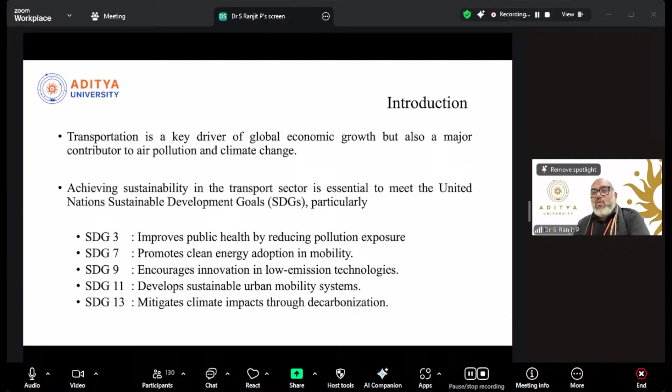It mitigates the climate impacts through decarbonization. That is one important thing I would like to say. One has to reduce emissions from the tailpipe of fuel vehicles, because mostly we are using conventional fuels and IC engines, and people are talking about so-called electric vehicles. I will come to that point, how good and bad electric vehicles are, I will discuss that.

Then the next point is environmental impacts of transportation. Transportation together contributes 25% of global carbon dioxide emissions. Out of this 25%, 75% is coming from road transport itself. There is air transport, road transport, and water transport. Out of which road transport contributes 75% of that 25% of global carbon dioxide emissions.

The pollutants include carbon dioxide, nitrogen oxides, sulfur dioxide, unburned hydrocarbons, and particulate matter. These are freely available in the environment but may cause a lot of disturbance to human life. These emissions cause smog formation, acid rains, contributing to global warming. Rather, I would replace this term global warming with global boiling now. There is no warming, it is boiling now, global boiling.

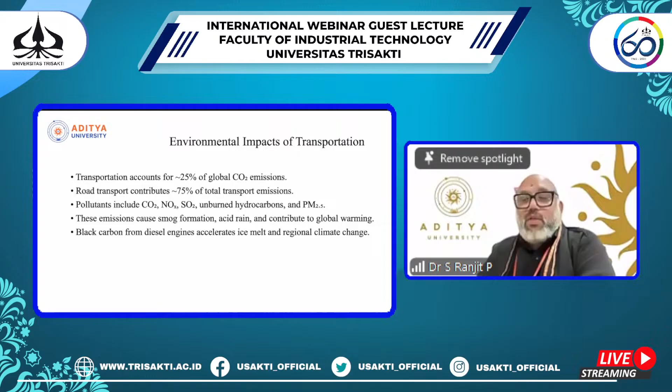And you do know that black carbon from diesel engines accelerates ice melting in the glaciers in the Himalayan region, and that is how sea level is rising. That is how, even in Indonesia and Jakarta, you know very well what the situation is and how much sea level rise has been taking place. You are well victims of this, only because of the pollution which is coming across.

Now then what do I have to do? I have to maintain some strategies for sustainable transport. The strategies, let me say, adoption of electric and hybrid vehicles. It's very good, the word looks very good, it sounds so great, everything is comfortable. Yes, very nice, electric vehicle and hybrid vehicle.

Now a very important point is, what is the tailpipe emission of the electric vehicle? Absolutely, emissions are zero except water. Water is not an emission. It's very good, but even water is not available as a tailpipe emission. Electric vehicles have no tailpipe, nothing as tailpipe emission. But what's the problem with the electric vehicle?

Electric vehicle, the present-day problem is very simple. One is the charging, second is protection, third is what kind of electricity you are using to charge the vehicle - is it green electricity or not?

The reason being, if you are generating electricity using non-renewable sources like fossil fuels or similar activities, then you are just shifting emissions from the tailpipe to the chimney of a thermal power plant, which doesn't make any sense. Whether polluting from the tailpipe or from the thermal power plant chimney, it remains the same - the environment is being polluted, just for the sake of not polluting in the city while polluting outside it. That doesn't make any sense.

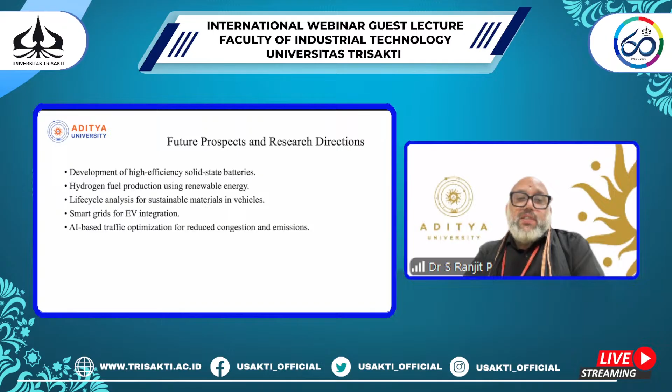But this will help reduce congestion in the traffic, so emissions can be reduced.

Next, there are some case studies on sustainable transport. For example, Norway: 90% of Norway is mainly depending on renewable energy, out of which 80% of new car sales are electric. The reason being they depend on renewable energy, that's why they are using electric vehicles. There's no doubt about it. You can go ahead with it.

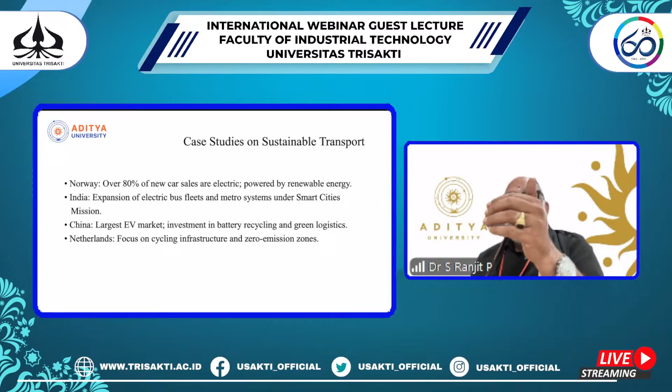And India is expanding the electric bus fleet and metro systems under the smart cities mission. But the electric bus fleet doesn't make any sense unless India changes technology from thermal power plants to nuclear power plants and renewable energy sources. Again, renewable energy, nuclear power plants is a big debate - radiation is the big debate, and I don't want to comment on that. But rather than the nuclear radiation death rate, if you look at the death rate because of accidents, the accident death rate is very high, exponentially, compared to the radiation death rate. But people are not aware of all these things. Simply, they say nuclear energy is not permitted in our area only because of radiation. People must be aware of it.

Then, when you have new renewable energy in place, electric vehicle technology is the topmost.

Next is China, where most of the lithium-ion battery materials are being imported from, and most of the resources are available there, making them global leaders in the EV market. Let me say very frankly, they are supplying a huge amount of battery material to the world. That is how they are growing. And the Netherlands, another way.

If not electric vehicles, why don't you use cycling? It's not that everything needs a bike available. Check it out, there is no path available for cycling in these Asian countries, except a few areas like Japan. Otherwise Asian countries don't give that much importance to cycling, including India. We feel that cycling means we are the poor guys.

But my dear friends, I am saying that in developed countries a separate path is dedicated for pedestrians, and a separate path dedicated for cyclists. That's why top priority is given to them. That is how people are using it.

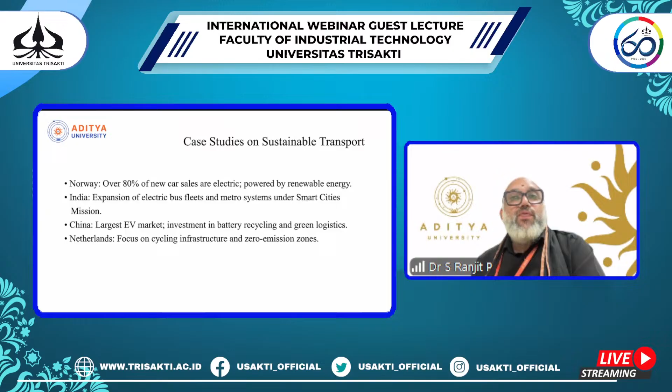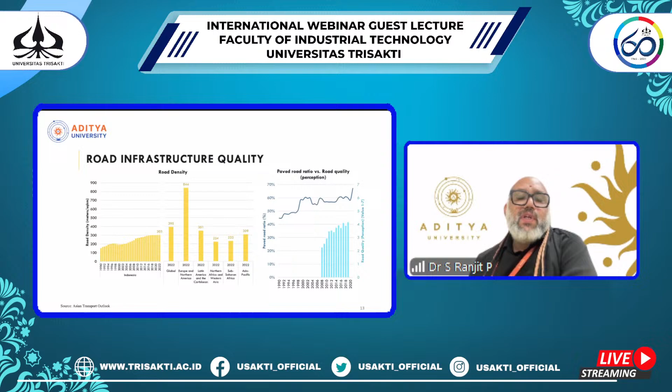Now road infrastructure quality, let's consider this in the form of road density. Checking from 1990, 92, 94 to 2022, the road density is increasing in Indonesia. It's a good sign, it's increasing.

If you look at other places, Europe has the maximum at 844, of course there's no comparison between Indonesia and Europe. Looking at Asia Pacific, Sub-Saharan Africa, Northern Africa, Latin America, the global figure itself is 395. Indonesia is 303, which is okay, not bad. But Europe has reached a road density of 844, the topmost.

That's the road density, meaning how many kilometers of road is being constructed in a given square kilometer of area. That's most important. Road construction is the topmost priority.

Because if the infrastructure is in place and transportation can be maintained perfectly in a sustainable way, then the nation can reach the next level in the forthcoming years. Without infrastructure, having good technology in vehicles, sustainable engines, sustainable vehicles available, doesn't make any sense. First is infrastructure. Infrastructure needs to be there.

Infrastructure, the first and foremost important thing, is the road. If the connectivity of the road is there, and if you can travel 200 or 400 kilometers in just 1 hour, 1.5 hours, that's a great honor, that nation can reach the next level. That's most important, what the developed countries are planning into. That's the way we can look into it.

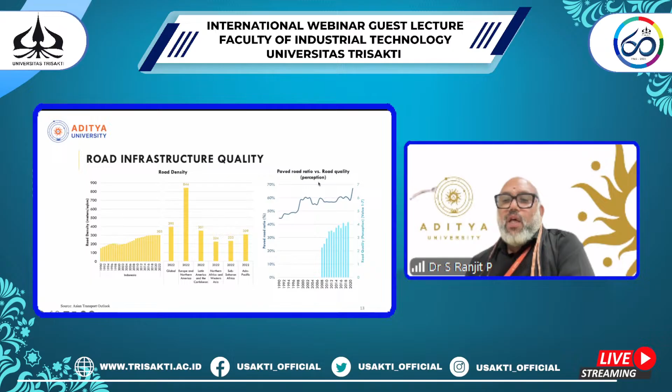Now if you see the paved road ratio with the road quality, it is also increasing. That's great, one can look into that aspect.

And the vehicle registrations, if you look at that, now in Indonesia the GDP per capita has increased by 4 times, and the road infrastructure has only doubled. Just check this out, this is the problem where Jakarta is experiencing traffic. Per capita GDP increased by 4 times, everyone is now becoming richer and richer.

It's okay, it's a good sign. But are the roads available according to the requirement of the public infrastructure? The answer is no. That needs to be concentrated on.

Vehicle registrations have increased by 15 times, and two-wheelers have increased by 19 times. This is most important, my dear colleagues, student friends and researchers. This is what civil engineering also has to look into: are we really developing the infrastructure according to the requirement of the vehicles?

Because on one side we have industrial engineering, mechanical engineering, electrical engineering, whatever departments involved, developing vehicles, electric vehicles, ICE engine vehicles, and all other vehicles. But do we really have the road infrastructure available? That's the big question mark, that's the reason why we are facing this.

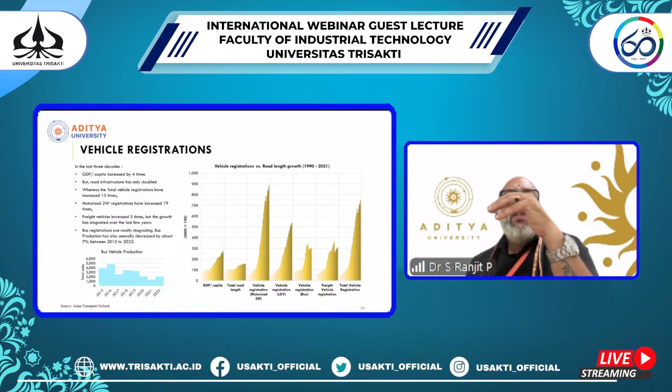Of course here and there, one or two common vehicle sectors are going to be stagnant. It's not a big deal, because mostly we Asians prefer two-wheelers over four-wheelers, the reason being small family size or economical conditions, whatever it is.

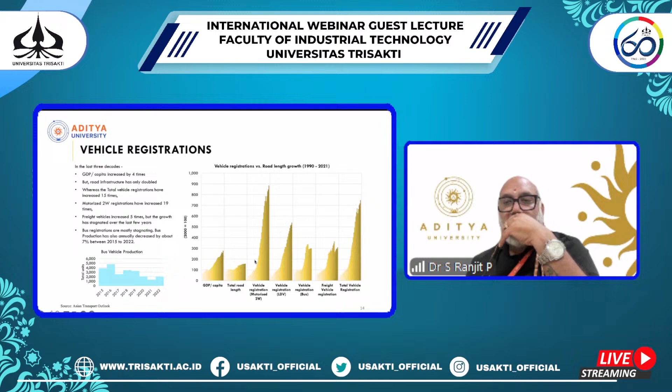Now you see the GDP per capita, total road length, and vehicle registrations for motorized vehicles, light duty vehicles, buses, freight vehicles, total vehicle registration. It keeps on increasing, which is a good sign, but the road also has to keep up. This is the only thing less compared to any other graph mentioned, between 1990 to 2021. This needs to be understood.

And now vehicle ownership and total production. Look at vehicle ownership, check what the population was in 1990 and the vehicle population in 2020. Out of 1,000 people, around 500 people own a vehicle. It's a good sign that a person individually is owning a vehicle.

It's a good sign. But really, are we going to have that infrastructure to run your vehicle on the road? That needs to be taken care by the government, needs to be understood.

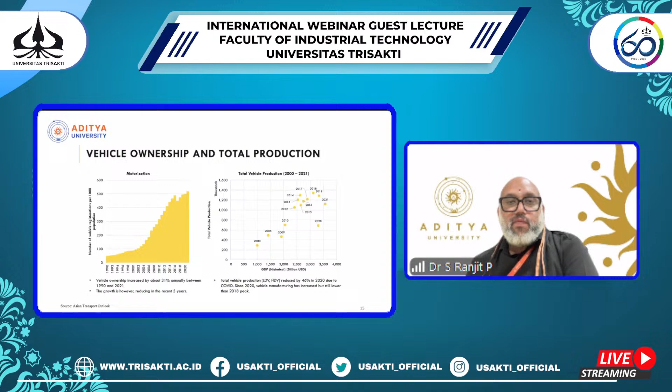If you see the vehicle production until 2018, there is good production, then suddenly there was a fall after 18. The reason is COVID. COVID makes a lot of difference in human life, because earlier we used to say BC and AD, now today we are talking about before COVID and after COVID. The COVID has that much impact. However, there is still a possibility that in the forthcoming years the growth can be increased further.

Now you see the transport sector and climate change. This is the transport and energy consumption with respect to road, rail, domestic navigation and domestic aviation. Comparing to aviation and navigation, meaning marine and aviation flights, and rail, road energy consumption is very high. Road vehicle utilization in Indonesia is very high compared to any other aspect. Asia Pacific is also the same. Globally it's also the same, globally it's even more than Indonesia. And this is consistent whether it's 2000, 2015, or 2020.

Check it out, road transport is dominant because, though I have a chartered flight available, my own flight available, I have to reach the aerodrome by road only. There is no other way. One more important point: automobile is the status symbol of any individual. If I'm driving my Volkswagen, or driving a Mercedes-Benz or Audi, it makes a difference. Even if I am driving a Rolls-Royce, it makes a difference. That's why automobile is a social status symbol, and it majorly contributes to the transportation sector. That's why, whether in Indonesia, Asia Pacific, or globally, most of the transport energy consumption is with road vehicles compared to other transport sectors.

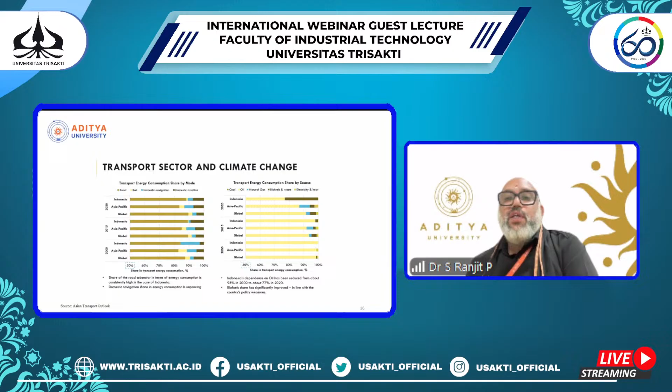It's a very good sign. It's a great applause from my side for the Indonesian people and the nation for taking such a great initiative towards climate change.

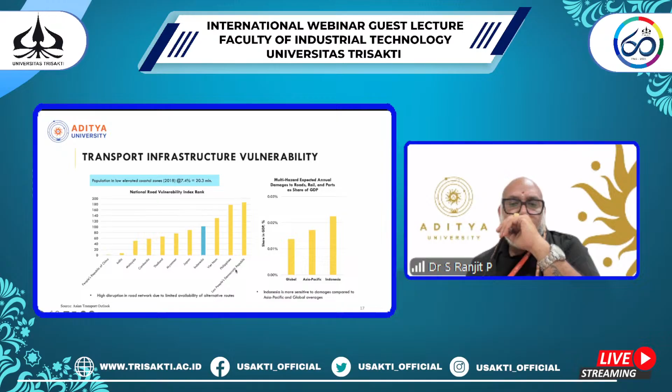Next is the transportation infrastructure vulnerability. If you check it out, China and India have no much vulnerability for the road, when it comes to the Lao People's Democratic Republic, Philippines, Indonesia and Indonesia, and also Japan, these are major prone areas. This is because of natural calamities being very high at these places. Indonesia, Indonesia, Philippines, and Lao People's Democratic Republic may have very high earthquake risk, so there is a possibility of most damage to the roads. That's why the vulnerability index rank is very high in this region.

In spite of that, the infrastructure which I witnessed at Jakarta is very high, very good, very important. One has to appreciate that aspect.

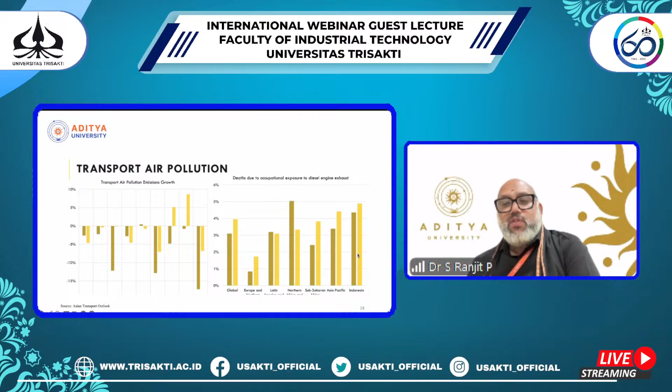Next is the transportation air pollution. Comparing 15, 20, and 2025, transportation emissions are less, and that has to be appreciated. But deaths due to occupational exposure to exhaust are increasing, and that needs to be considered in Indonesia. Now I'm coming to the mechanism of air pollutant formation.

May I know from the host whether I am on time or exceeding my time? Is the audience with me regarding the emissions and engine's point of view? Yes Prof, speak right, please go ahead.

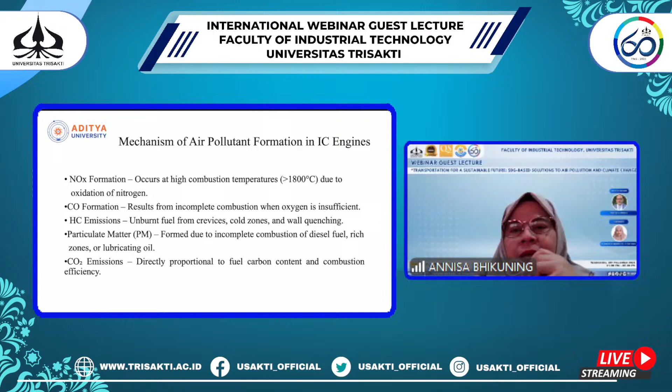Thank you. I am worried about the post-lunch session because after lunch the listener is energized but on the other side they tend to get sleepy. Handling a post-lunch session is a very difficult task, and you asked me to handle that session, that's why I'm looking at it carefully.

Now let me talk about the most important air pollutants from petrol engines and diesel engines. Petrol engine emissions are different from diesel engine emissions. Different in the sense that it's not like petrol engine emissions are absent in diesel engines or vice versa - everything is available everywhere, but the dominating factor is what matters most.

In petrol engine emissions, we mainly concentrate on carbon monoxide, carbon dioxide, and unburned hydrocarbons. Whereas in diesel engines, we concentrate mostly on nitrogen oxides and smoke. We are never bothered about carbon monoxide, carbon dioxide, and unburned hydrocarbons in diesel engines.

The reason is that the temperature inside the diesel combustion chamber is very, very high. When the temperature is very high, there is no question of carbon monoxide or carbon dioxide forming, and unburned hydrocarbons also reduce. But the problem with diesel engines is they create NOx and smoke - these are the two parameters. That's why for diesel engines we measure only NOx and smoke.

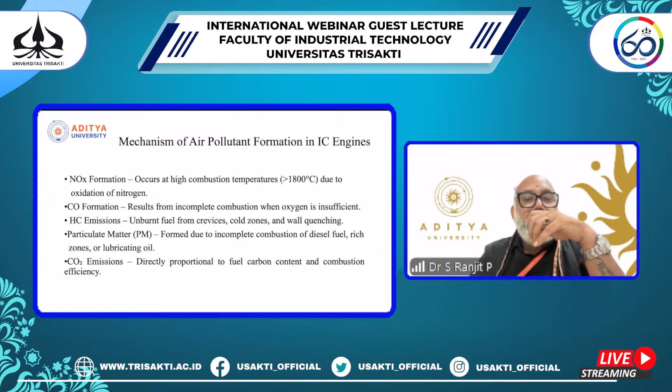In India, I don't know about Indonesia, but there is around 10 to 12 rupees difference between petrol and diesel prices - diesel is less than petrol. The reason is that the government has given subsidy to diesel for the transportation sector fuel. But from a manufacturing and distillation point of view, getting diesel and petrol from crude oil has no much difference in price. The price remains the same, but government is intentionally giving subsidy to reduce transportation cost.

It's very important to keep in mind that NOx formation happens only in diesel engines, not in petrol engines. This is because the temperature in the diesel engine is very high, which causes the inert gas, so-called nitrogen, to react at high temperatures, forming NOx.

CO formation is because of incomplete combustion. When proper air and proper oxygen are not available inside the engine, there is a possibility of carbon monoxide formation.

Hydrocarbon emissions occur because of wall quenching, crevices, and cold zones - these are the different causes. Wall quenching means when you're injecting the fuel, if it doesn't mix with the air and instead contacts the cylinder walls, then proper mixing is not possible. This is a very simple fundamental of the fuel. I could say, as an IC engine person, though I can't call myself an expert.

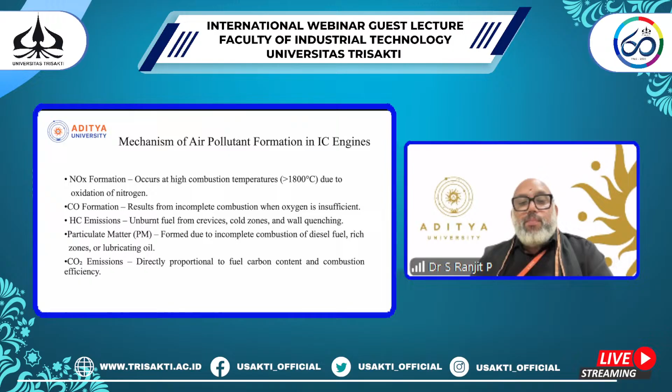Next is a very important factor: engine and operating variables. One is the fuel air ratio, which we represent by phi, the ratio of fuel to air. If it is less than 1, it's called a lean mixture; greater than 1, a rich mixture; equal to 1, a stoichiometric mixture. Stoichiometric mixture means chemically correct mixture - to burn 1 kg of fuel, how much kg of air is required?

You may ask me one question, Professor: we are pouring diesel and petrol in liters, but you are talking on a mass basis, kg. The reason is that the specific gravity of fuels will change time to time, batch to batch, petrol outlet to petrol outlet. That's why, rather than using volume basis, research in engines always happens on a mass basis. That's most important, one has to keep in mind.

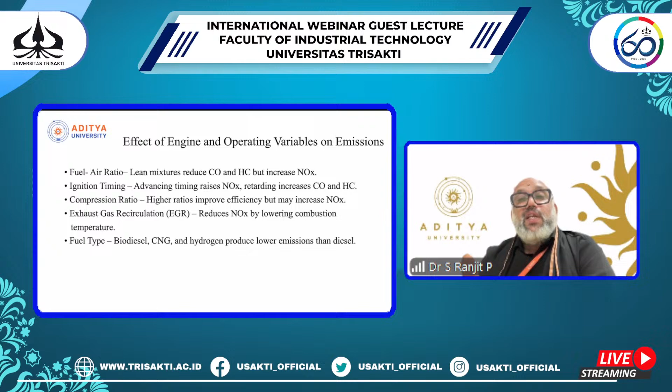People then followed different strategies using after-treatment devices like catalytic converters, diesel particulate filters, and selective catalytic reduction systems to reduce emissions inside vehicles. Then engine design modifications were done, optimizing combustion chambers and fuel injection systems.

Now if you check, open any direct injection diesel engine, none of the pistons have a flat surface. Earlier we had indirect injection engines, which were used during the Second World War, World War II.

The reason being, when a tank entered the war, it was used with diesel fuel and everything. But in the war zone there were no petrol outlets. Once that was completed, the tank had to move forward to fight in the war. Then whatever oils they were carrying along with them for food purposes and everything, they used those oils in the indirect injection engines. That's how the tank moved forward to participate in the war. That's how indirect injection engines came about.

Indirect injection engines are good for any kind of fuel, but direct injection engines are not good for any kind of fuel. Direct injection engines are only good for very fine atomized fuels. That's why turbulence is very important.

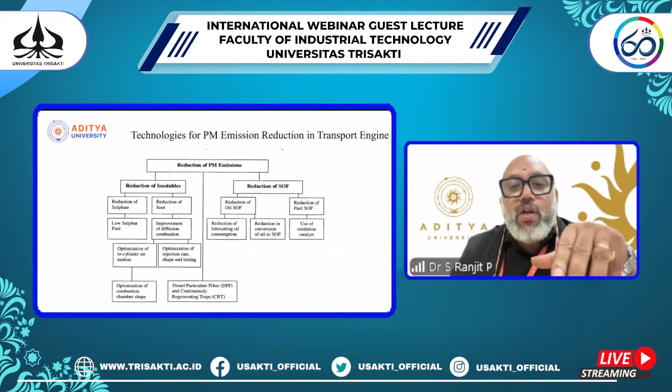This is the very core into the engineering. But if anybody is interested, we have another discussion on the core engine's combustion process that I will discuss some other time. Please let me know if you have any doubts, I'm very happy to clear it.